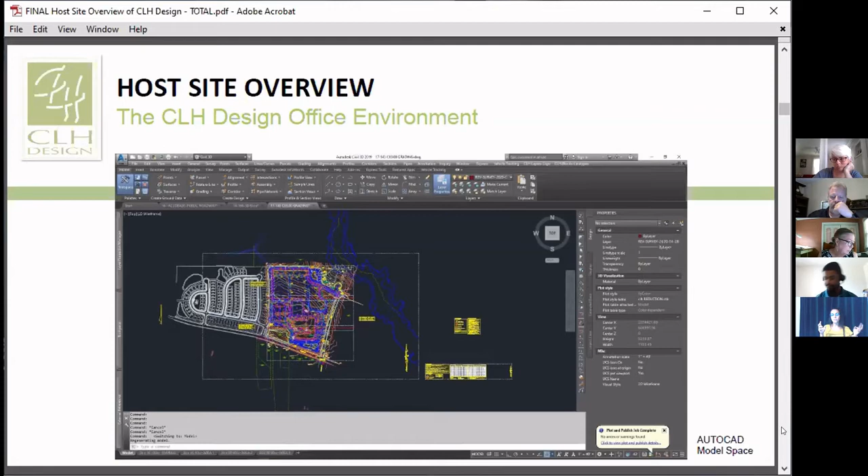Usually we'll do most of our calculations in spreadsheets. A lot of times it's complicated calculations, but everything can be done in spreadsheets. We also use other programs for routings, and we mostly design in AutoCAD. We design on the computer and create our sheets, which we submit to the owners or reviewers showing what the actual plans look like. AutoCAD stands for computer aided drafting, and this is where we do a good chunk of our work to produce these drawings.

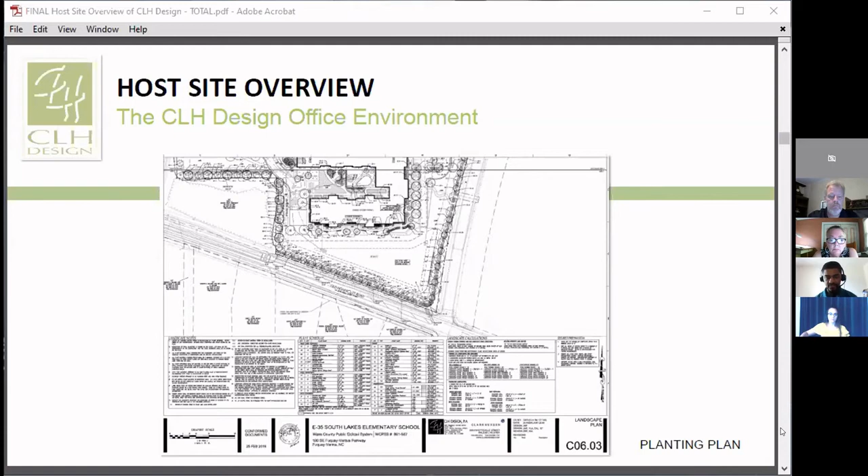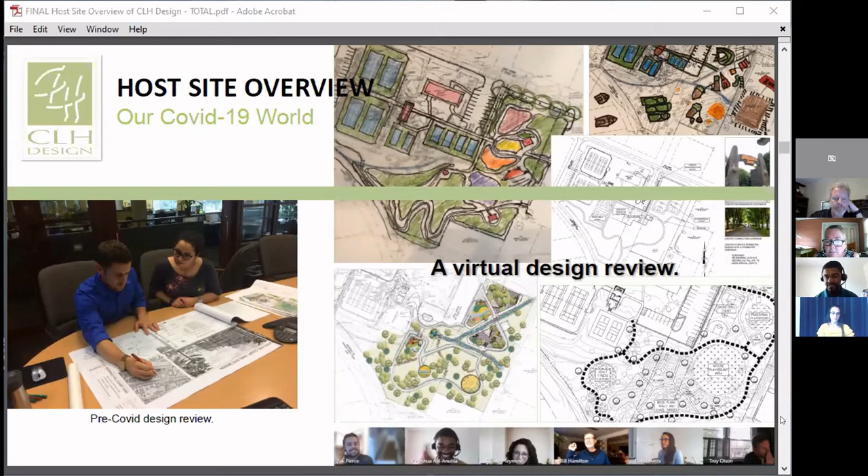Here is kind of pre-COVID and post-COVID, the left being pre and the right being post. This pandemic is a reality, but there's a silver lining in it, teaching us different ways to communicate effectively. On the left was a typical thing we'd do in the office: sit over plans, review things, and red line plans, which were just revisions, clouding and marking notes so we can go back to the drawings and revise. On the right was actually a presentation of ideas done via Microsoft Teams, similar to Zoom. Typically we use Microsoft Teams in our office since it's easier to use for how we set things up.

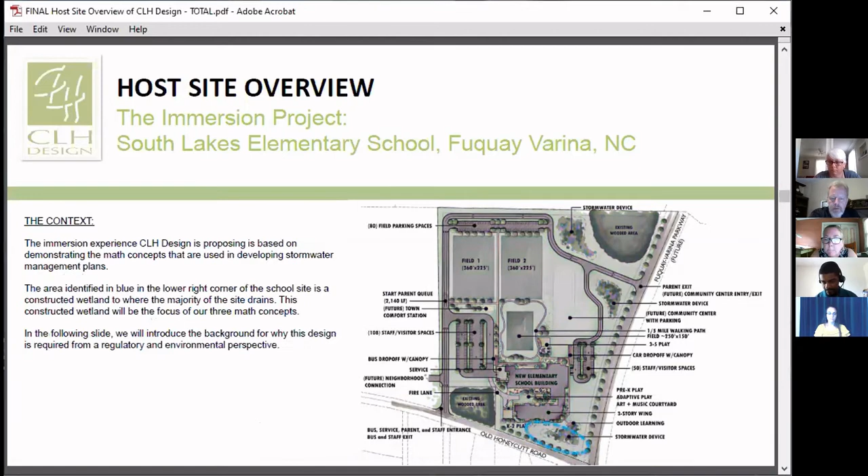Here's our site, the focus of the problems we'll be doing: South Lakes Elementary School, in Fuquay Varina. You see the school building to the south, we have two parking lots, and a smaller field in the middle mainly for the elementary kids. We also have two fields towards the north for a future community center, so we had to grade out the site and plan accordingly for the future. The focus wetland is the one at the very bottom of the screen, right there. One of those wetlands didn't make it through the full project — that's the one off to the east of the project, right near the drive.

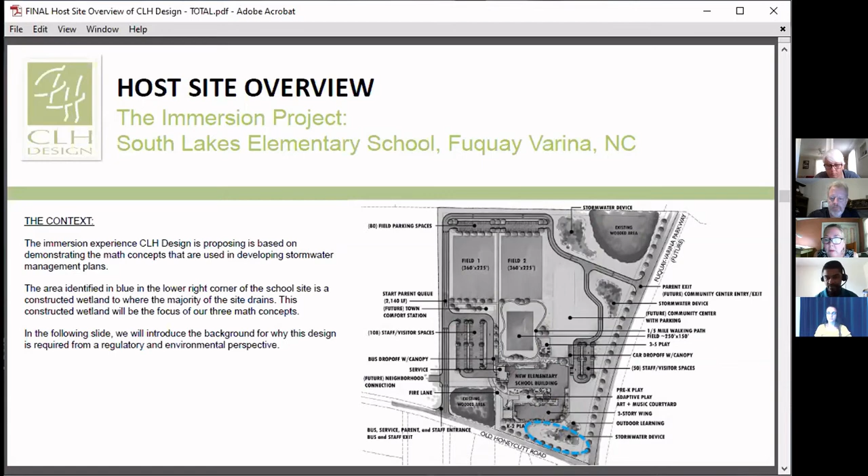That's just the evolution of design. You find that you don't necessarily need all the wetlands as you go through the design process. There are federal, state, and local municipality regulations for stormwater, and there are basically two things that we analyze.

On stormwater quantity, what we want to do is maintain the same amount of water leaving the site as before we went in and constructed something. That needs to be maintained. We cannot allow more water to leave the site because that would cause problems downstream of the project.

There are multiple ways we can detain the quantity. We can have ponds, be it dry ponds or wet ponds, or we can even have cisterns that can be above ground or below ground.

From the quality standpoint, we have to analyze the state of the water when it leaves the site. If you imagine pristine woods, there's nothing there to pollute the water. But once we build the site, imagine a school with fields - you don't think of fields as pollutants, but to have those beautiful green fields you need pesticides, fertilizers, herbicides, and a lot of things. You'll also have parking lots where cars leak oil. There's a lot of things.

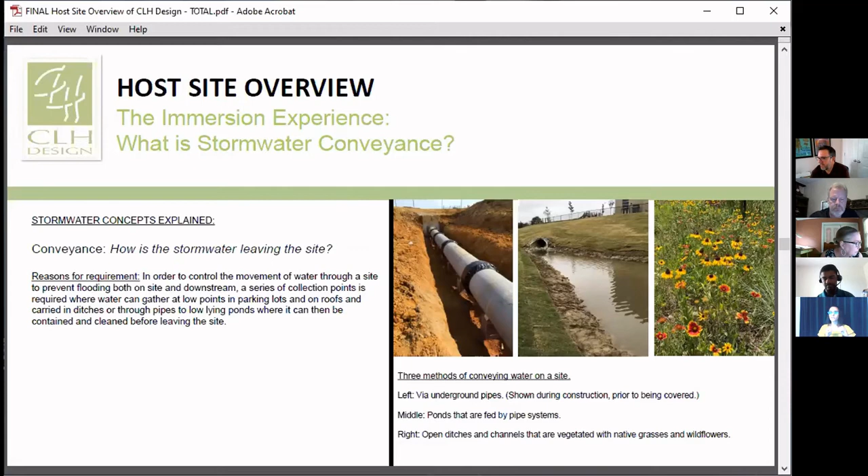It's also very important to analyze the conveyance of the stormwater - how the water moves through our site and once it leaves the site. For this, we design stormwater pipes. In the first image, that's a pipe that goes underneath the ground, and we can also have channels. What's very important is to size them so they have the capacity to carry the water without flooding upstream or downstream. We also manage the velocity so it won't cause erosion downstream.

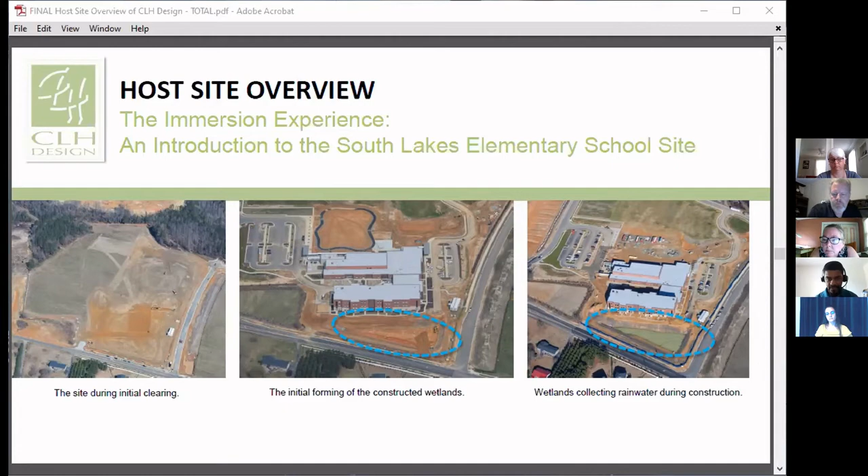For the first thing we do in the site analysis, we determine the amount of water leaving the site. We call this the peak discharge for the pre-development condition. To do this, the first thing we analyze is the runoff coefficient.

The runoff coefficient depends on the type of soil and the type of ground cover we have. There are many types of soils, and they all work differently - they're subdivided into four types of soil. In this site, for example, we had type A and type B.

We can have sandy soils - if you think about it, sand always allows more water to drain through it. Then you can have more clayey soils, which don't absorb much water - it absorbs a little and then starts sheet flowing. That's why soils are important in our analysis. The type of ground cover also affects whether water can infiltrate or just sheet flows off - a grass lawn field, a forest, or impervious surfaces will all behave differently.

We consider impervious surfaces any type of surface that won't allow water to drain through it. Think of roofs, pavement, sidewalks, anything like that. To determine this runoff coefficient, we use a weighted average, depending on whenever we have different soil types or different types of ground cover.

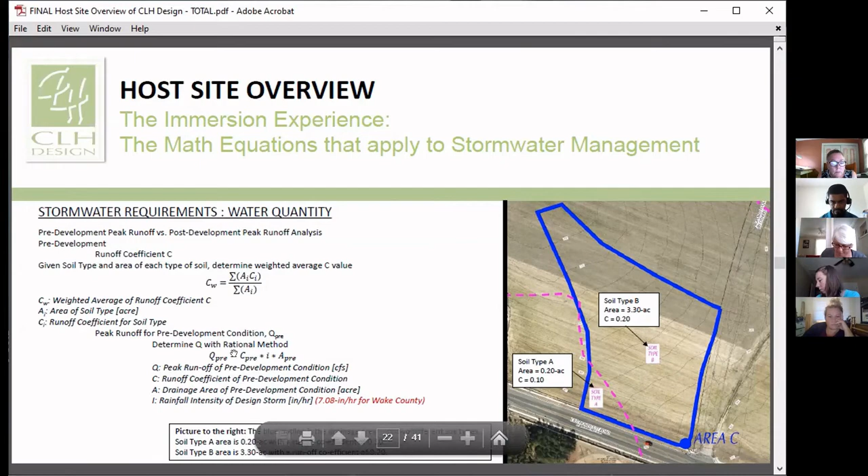Here's the actual results, the calculation written out. What we call this - I'm not sure if this is a math term or not - but we call it a weighted average. You run through those numbers from the map on the previous page, the 0.2 acres and the 3.3 acres, and you get that C of 0.19. It gets plugged in down here. We've got the 7.08, which is given, and that's the total acreage where we added the soil A and soil B areas together. And you come up with 4.7 cubic feet per second.

So with that, we could move on to the next one, which is essentially the same calculation, but now this is the post-development conditions, where you can see that blue area has gotten very large. Now we're not worried about soil conditions because we're manipulating the land, but we have what we're calling impervious, which is the blue color. Then the edges, where we have grass and landscaping, we're calling pervious, and those also have runoff coefficients that differ.

Just to explain that a little bit, the impervious blue area, which is our roofs and pavements and sidewalks, has a runoff coefficient of 0.95. Really what the runoff coefficient means is if you had a coefficient of 1, all the water that fell on that surface would accumulate and run to one point. Even with pavement and roof, we get some evaporation and some absorption, so that's why it's not quite 1, but it's pretty darn close. You go down to the grass and landscaping, that coefficient is 0.35, because we get a lot more of it infiltrating into the ground and evaporating, and plants absorb it. So that gives you an idea what that coefficient means.

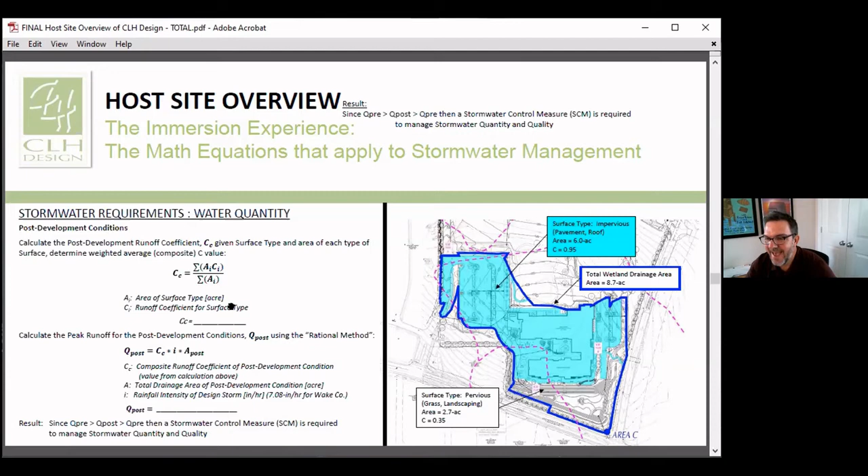Now, obviously 0.95 for the impervious areas and 0.35 for the grass areas are both much higher than our old peanut farm. So not only do we have a much bigger area, but now we have surfaces that are not absorbing as much water. The math on this page is the same as it was on the previous one, just now we're doing the after conditions - those exact same formulas, just different numbers. And what was 4.7 is now about 10 times as much.

We're almost at 47 cubic feet per second. Now what we do is we compare this 47 CFS after construction to that 4.7 from before, and obviously the conclusion is our post-construction runoff, Q post, is much higher than Q pre.

So we need a stormwater device. Architects have to design around a building code, and it's statewide, so there's one code they need to know. Ours varies—Garner has different rules than Apex, which has different rules than Wake County, which has different rules than the state of North Carolina.

In general, it starts with the state, and then the state gives local counties an opportunity to come up with their own requirements. If they are equal to or more stringent than the state, then the county can do it, and then it goes down to the town below that. We do some work in more rural counties that have no codes, which would then fall back to the state.

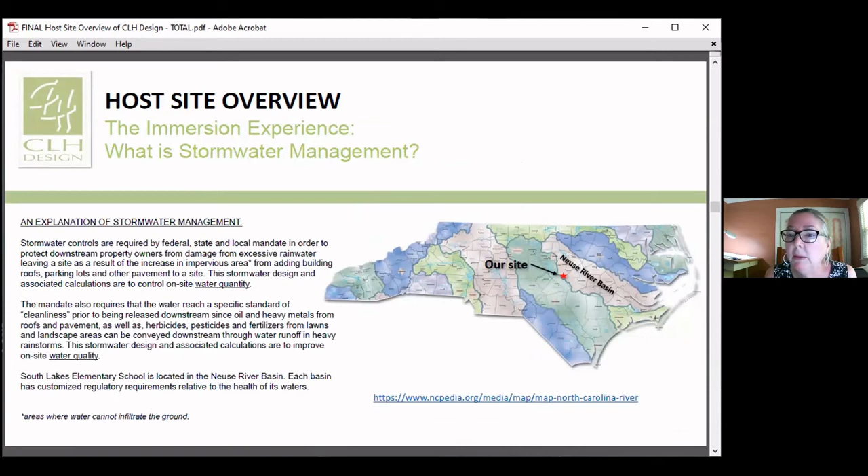That is a very small river basin, and it's very urban, and as a result it goes into the Pamlico Albemarle estuary, which I believe is actually one of the largest estuaries in the country. So yeah, it's a big deal, and that's why the regs are so strict.

So the next set of calculations—what we talked about at the beginning—is in the corners of this school site we've designed stormwater wetlands. We were concentrating on that one wetland in the bottom right-hand corner.

That wetland is going to be designed to hold water back and release it slowly so we don't cause flooding problems. But it's also going to hold water back and filter it, allowing plants to remove the nutrients. In our business, nutrients in stormwater are a bad thing—having nitrogen and phosphorus in stormwater is a bad thing. We try to get that out.

If it goes right through our site and into the Neuse River, those nutrients get in there, and all of a sudden algae likes those and starts to eat them, and the algae starts to bloom and get really heavy. Then it blocks sun from getting into the water and allowing normal native plants to grow, and that's why you get fish kills. So we're trying to get nutrients out, and the wetland is something that's been proven to be able to do that.

This page has three calculations on it. The first calculation is calculating what they call a runoff volume, or runoff value. What we're showing here is the percent impervious—the impervious area within the wetland drainage divided by the total area. So it would be the 6 acres of impervious divided by 8.7. Pretty simple—that then gets plugged into this calculation, and you end up with this RV value.

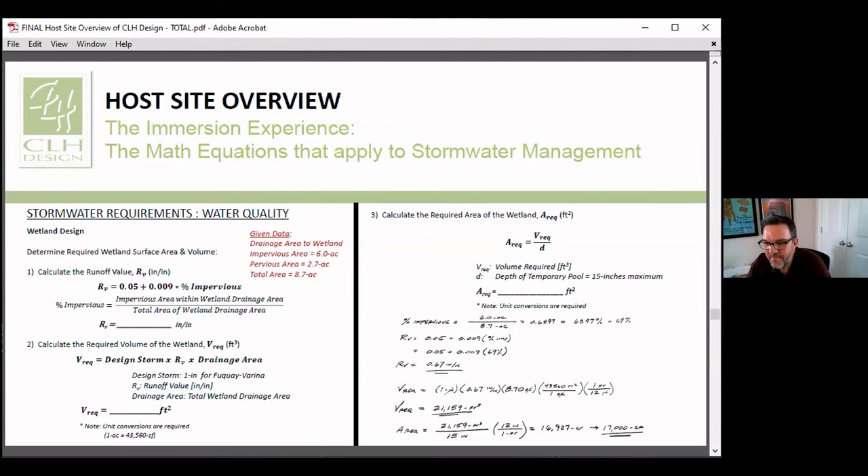The next one is, I think, bringing in a little more geometry into it. This is kind of a cross section of a wetland. We've got a channel going down the middle of the wetland. The dark blue in that cross section is where we will always have water in the wetland. We have a channel down the middle that's a little bit deeper that allows wildlife to travel through there. When it does rain, that's where most of the flow is going to be. If we do get an extended drought, that could stay wet and sustain our bugs and our reptiles and our amphibians that are living in this wetland until it rains again.

But basically the dark blue is what we call our permanent pool — it's the permanent water in there. And then on top of that is where we have to store that volume that we just calculated. I'm going to pop back and remember what that volume was: it was that 21,000 cubic feet. So the 21,000 cubic feet is what's in that light blue area, and that's only 15 inches deep.

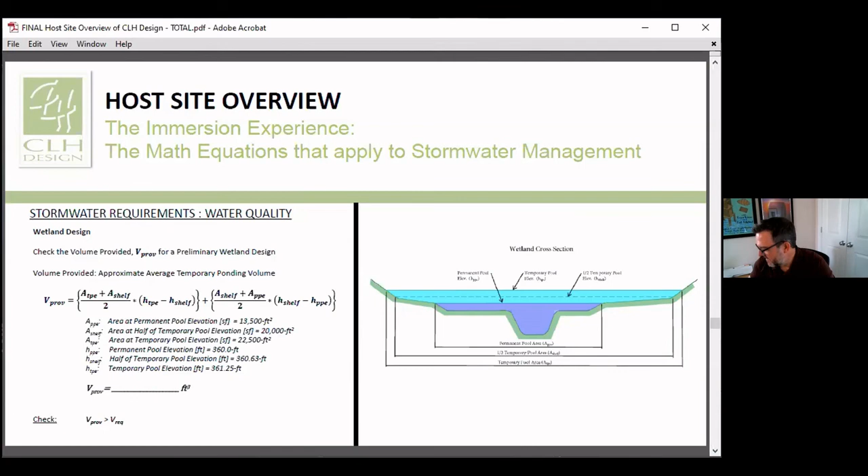So we're doing a calculation here. We call it average end area, where we're kind of splitting that into two sandwich slices of the light blue area. You can kind of see how the top slice, the sides of it are almost vertical, so it's almost like a cube. Whereas the lower slice, we have this very gentle shelf, so it's becoming more of a trapezoid, or a more exaggerated trapezoid. So this equation is just doing that math — it's just working volume of wetland. And we do this, and the way we do it in design is we had that 17,000 that we're working towards, and we came up with an area, and that's where kind of the landscape architecture comes in.

In the experience and art part of it, you're working with shapes that fit the land well. We do want to be a little bit more than the minimum required, and have a safety factor, because this is ultimately built by guys driving huge equipment, pushing dirt around, so they're not going to get it exactly right. We want to give them a little wiggle room. But the solution here, we come up with the volume our design has provided, and it's greater than what's required, so we're okay to move ahead.